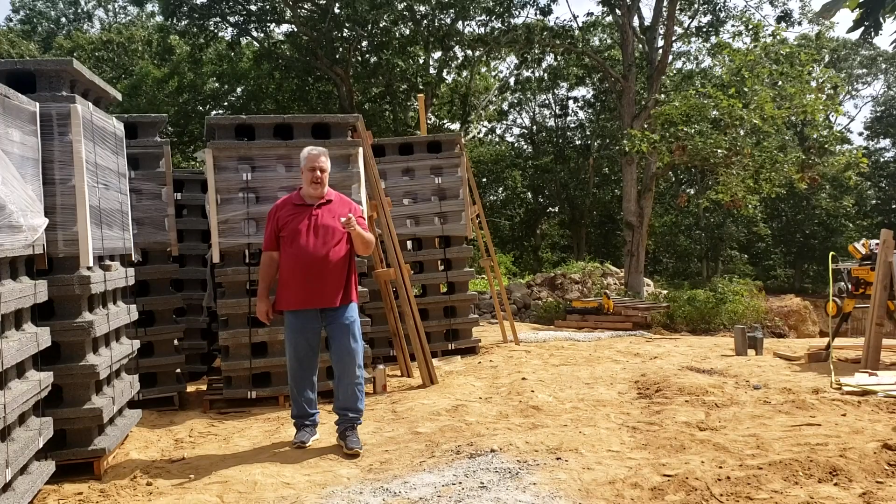Yes, we are starting a new project, so we're going to have probably a year's worth of videos coming live from this project. We're calling it the Vineyard Passive House. We're out here on Martha's Vineyard. The house that's going to be built here behind me is a certified passive house, and like any project, it starts with a really good foundation.

So we got some exciting stuff happening here, but before we get into talking about the foundation, let me introduce a good partner here. Farley is the builder of the project. He's also the owner of the home. So we have kind of the three-legged stool here between the two of us, and his wife, Daryl, of course. She makes a lot of decisions. We won't exclude her. But we have the design build team here.

We've been working on the house for a while, and as anything with passive house or anything that both Farley and I do, we like to scrutinize everything. So in this particular project, we talked about starting with the foundation. Well, we have your typical concrete footing, but that's where the typical foundation ends.

We're using this product. You can see behind me, we have these stacks of material here. So these are called the Perfect Block. They come from Arizona. Farley sourced them out for a number of reasons. I'm going to let Farley talk about that. But they get trucked up here and then ferried out to the island, and then they get put in place.

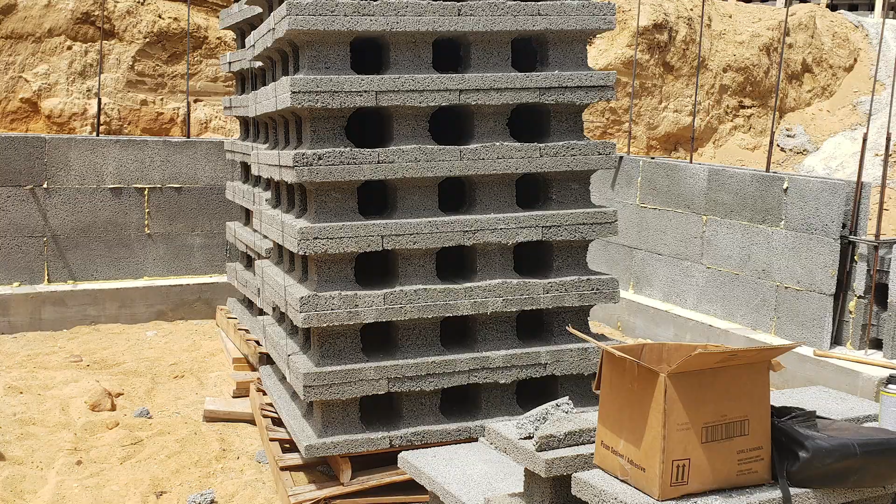Yeah, Steve. So these are what they refer to as an ICCF, insulated concrete composite form. So they're made with 87% recycled EPS, and then they get put into a slurry with concrete and a binding agent, and then put into a mold to create this block. The dimensions of the block are 12 inches tall, 48 inches wide, and 10 inches in depth. And they have these cores that you can see. They're 6-inch cores, spaced 12 inches on center.

And we source this block for a number of reasons. Being on an island, everything here gets trucked in. We have a concrete plant, but all of their raw material needs to be trucked in from off island. And by using these blocks, we're able to eliminate 70% of what we would normally need for concrete.

Yeah, so that's a huge number right there, right? You go from the 10-inch concrete wall down to using 30% of the concrete that you put into the traditional formwork. But I think you touched on something that's really interesting that a lot of us don't have to overcome in building.

When I'm back on the mainland, everything you do here, your commitment to build always has a strike against you in embodied energy, because everything has to get made somewhere else and be brought out here. Very few things - I mean, even your lumber, it's not cut on the island, it's not milled on the island and left here to be used. It's all brought out here. So your commitment to build from an environmental awareness is even more heightened than what we have to deal with in our struggles on the mainland.

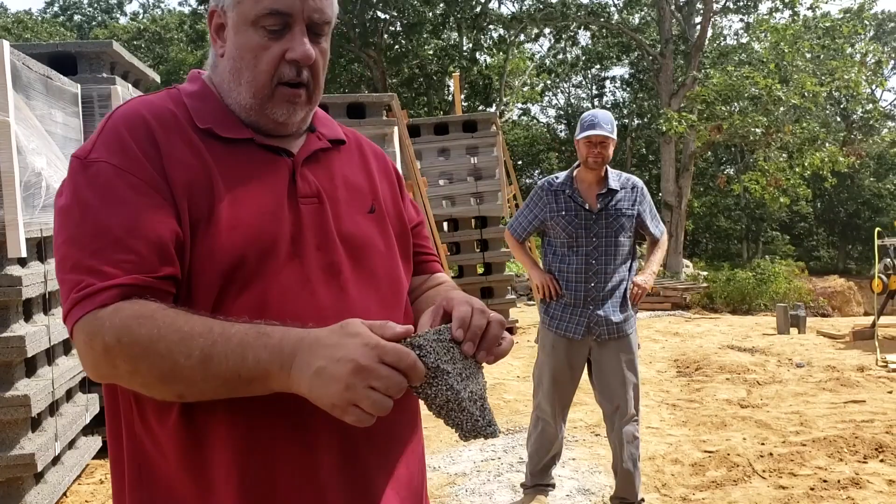And, to reiterate a couple of those points, everything you see behind me is almost 90% recycled material. So it already had a life. They took it, they ground it up. I actually grabbed a piece here that I can bring up and show you. You can see there, it's EPS. This is nothing more than the coffee cup you drank out of this morning. It just gets reconstituted. It's got this kind of concrete-ish type binder there that holds it all together. But it's basically a chunk of insulation that wraps around the concrete that gets reinforced.

And so the foundation gets its strength from the steel inside it and the core matrix that the blocks provide. So yeah, it's pretty cool stuff.

And this is fire retardant? Fire retardant, they actually refer to it as being fireproof. It's got a 4-hour fire rating, can resist up to 4,000 degrees. Another added benefit is that it's insect proof and rodent proof.

One of the concerns I've had about using a traditional ICF block is that it's used with a virgin EPS foam, so no recycled content. It's highly susceptible to insect damage. Even going to great lengths of protecting the wall once it's formed up, there's still a risk factor there. Termites are an issue here on the island. Insects, I would imagine, are an issue pretty much anywhere you go in the world. And so here we are coming up with a foundation that is using EPS foam, but 100% insect proof.

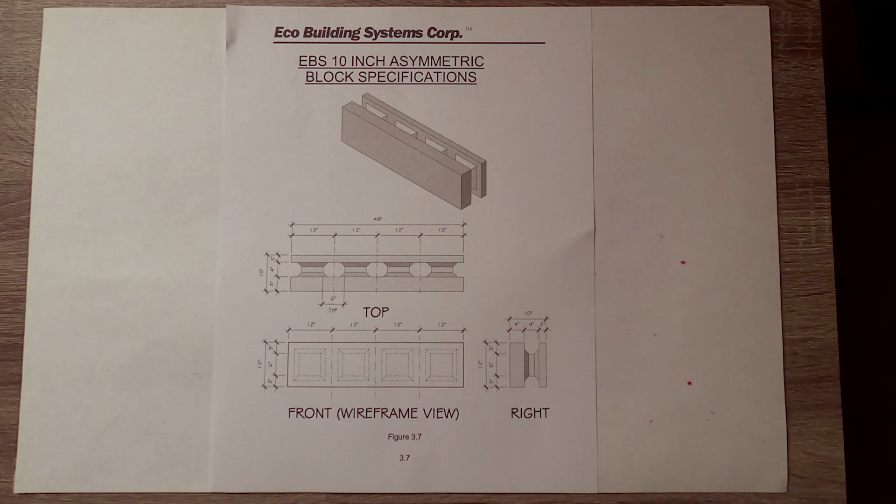So I printed out this one spec sheet here. It just gives you a quick overview of the block. You can see there, 48 inches, 10 inches wide, 12 inches.

This is actually the asymmetrical block. We have the symmetrical block out there. So we have two 2-inch layers.

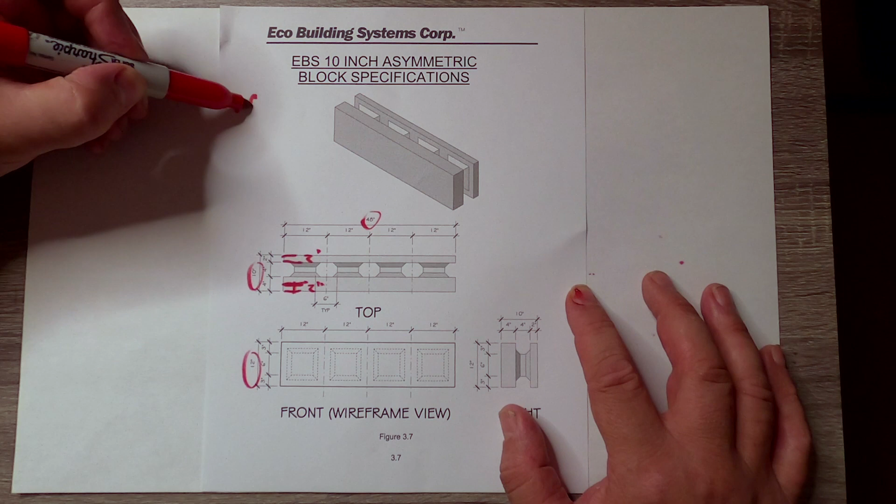But there's a lot of things that are pretty interesting about this block. One, it's not called an ICF, it's called an ICCF, and that stands for Insulated Concrete Composite Forms. The reason it's called a composite form is that 87% of this block is recycled material.

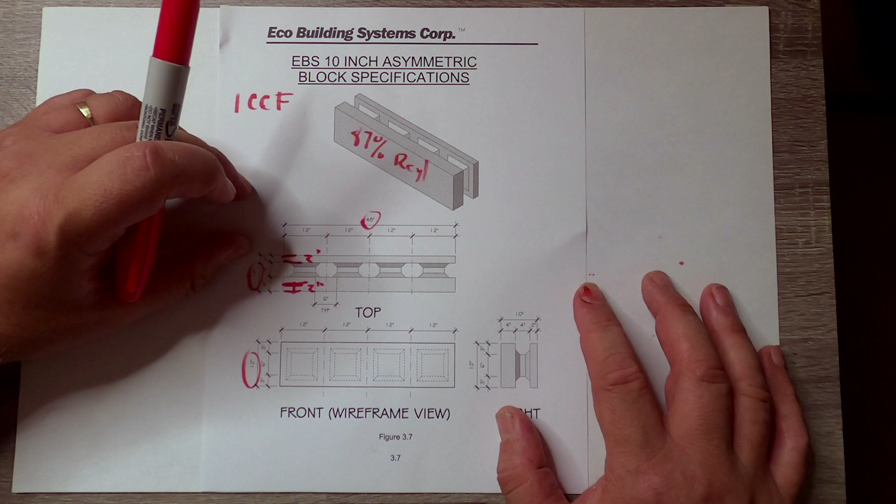This means the EPS was slated for the landfill or for trash. These companies bring their waste EPS to the Perfect Block or Eco Building Systems Corp, and then they reconstitute that recycled EPS with a binder, form these blocks, and ship them out to builders like Farley who want to build with them.

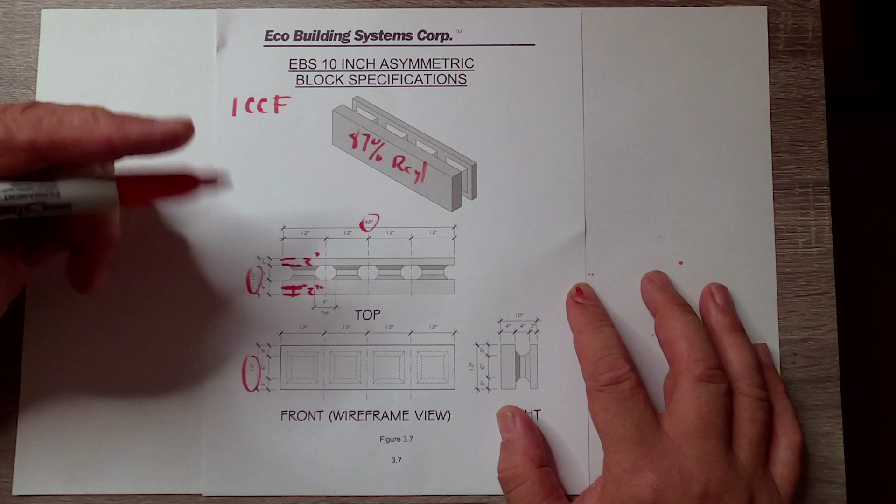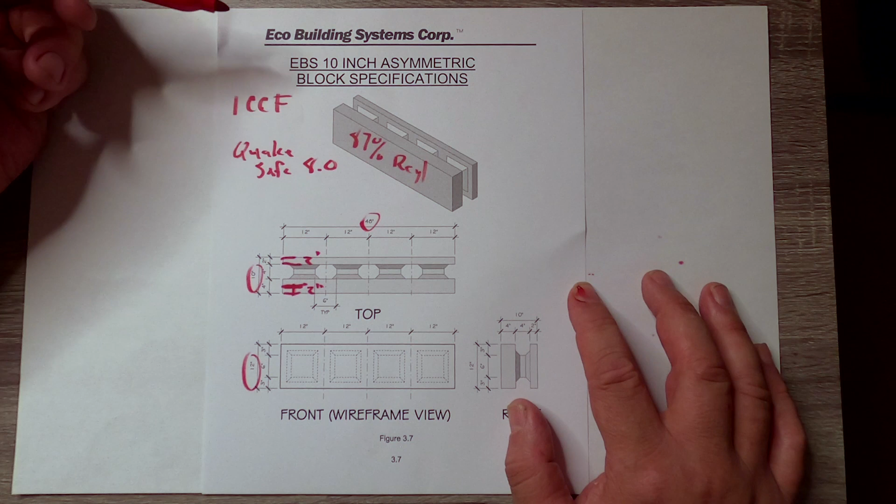There's a lot of cool things about the block. One, we just spoke of, 87% recycled, but it's what we call quake safe - never heard that term before - but rated to an 8.0. Given the right reinforcement schedule, you can build a pretty solid building here. It's also rated for 250 mile per hour wind, which is a pretty good hefty hurricane that it can tolerate, again, with the right reinforcing schedule.

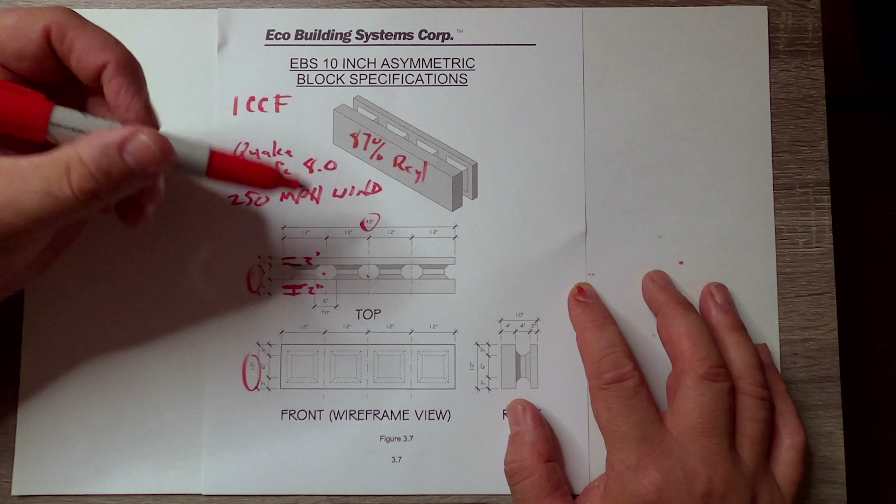The cool thing about this block is you have 3 cores, 12 inches on center. Ours called for number 4 bars every 24 inches, but you could make this a stiffer wall by adding reinforcing to each of those vertical cores. And the horizontal courses, we likewise had number 4 bars every 24 inches, and we could increase those to get those numbers working for us.

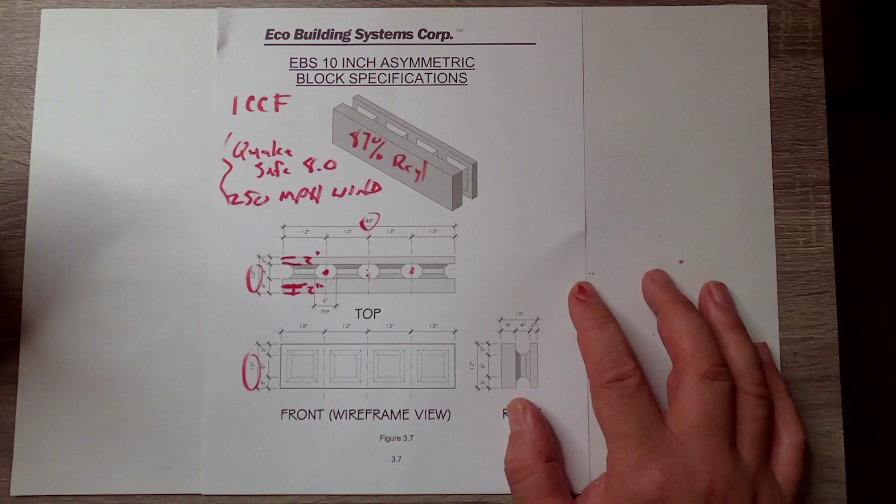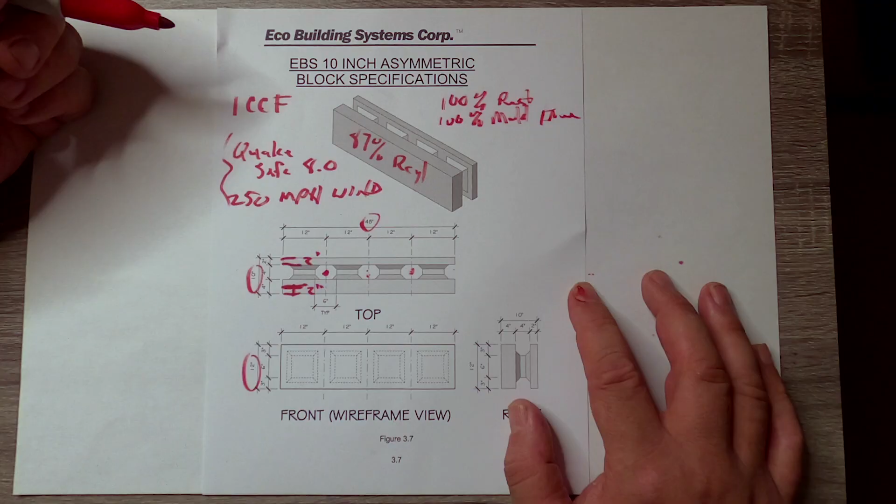But a couple other things. One, these are 100% pest-free, meaning animals don't like to chew them, they don't want to live in them, they don't care about them. It is 100% mold-free because there's no organic material there to sustain mold growth. They are 100% termite-free. So all of you living in those termite-infested areas, guess what? We got a solution for you, the Perfect Block.

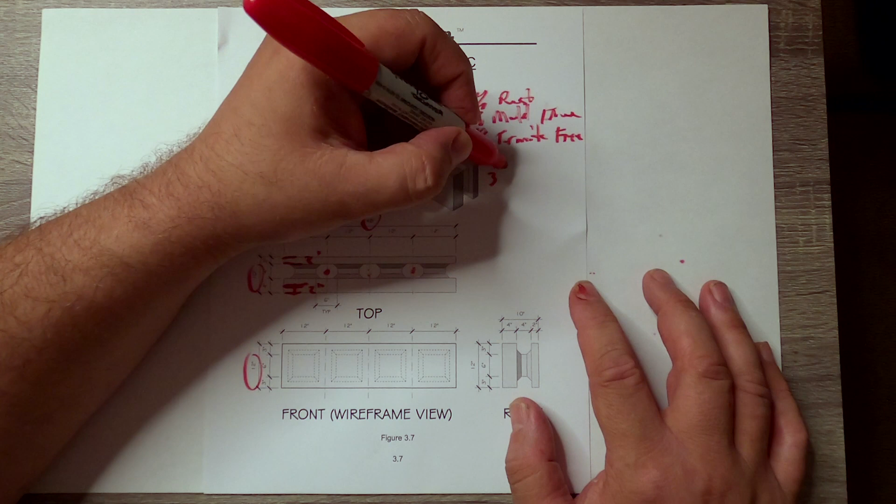A couple other things. We talked about the size. The weight of these blocks - you heard Farley say they're about 40 pounds - but depending on the size, they range from about 30 to 50 pounds. So they're big enough where one person can handle them on their own, but 2 can do it really successfully and lay them up pretty quick.

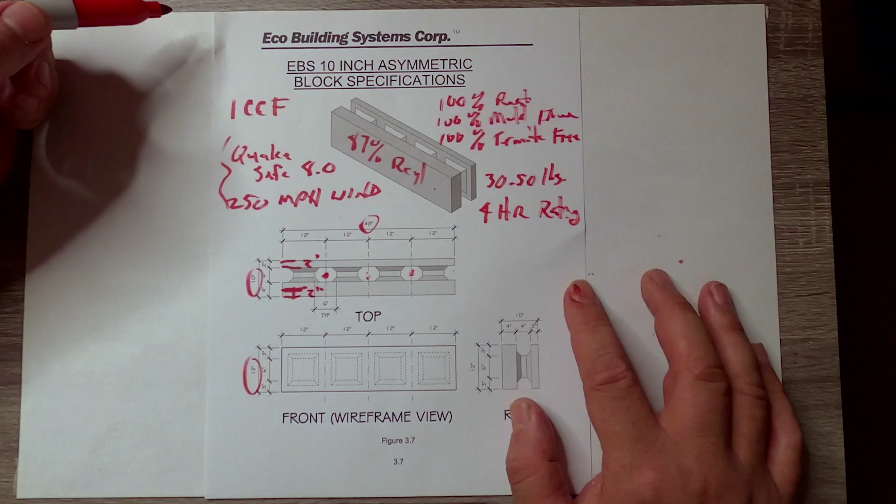The block itself has a 4-hour fire rating when you pour the concrete in there, so that's about as stiff a fire rating as you'll ever need. The blocks don't ignite, so you can't get them on fire. So if you're in areas where you have forest fires and brush fires, the Perfect Block might be a really good answer for that.

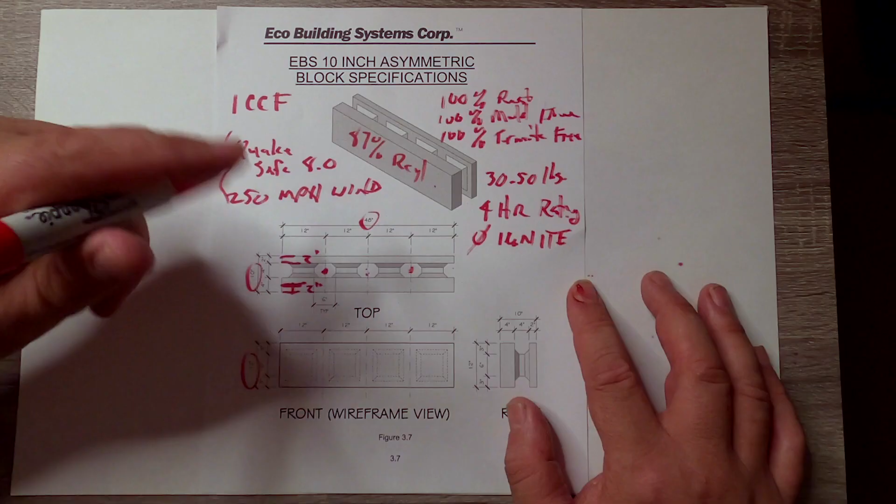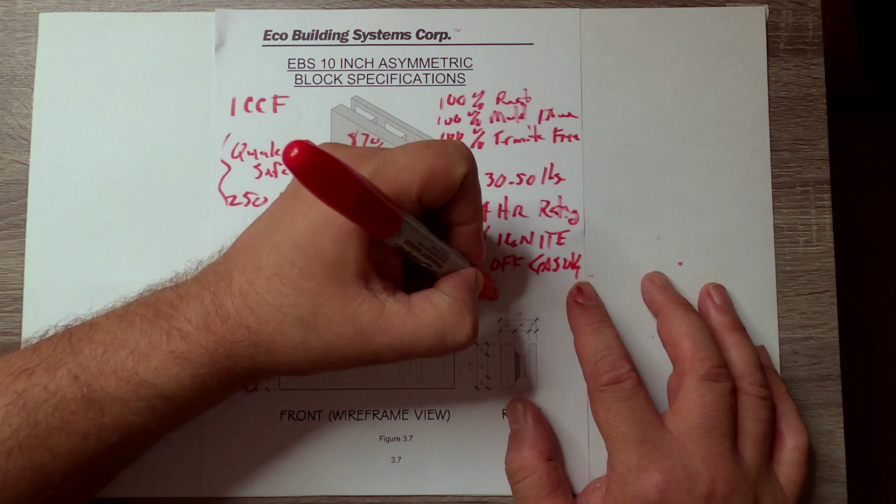There is 0 off-gassing. So these blocks, after they're made and sent out to the job site, they're pretty much inert, nothing there. And there is 0 UV degradation - UV doesn't kill them.

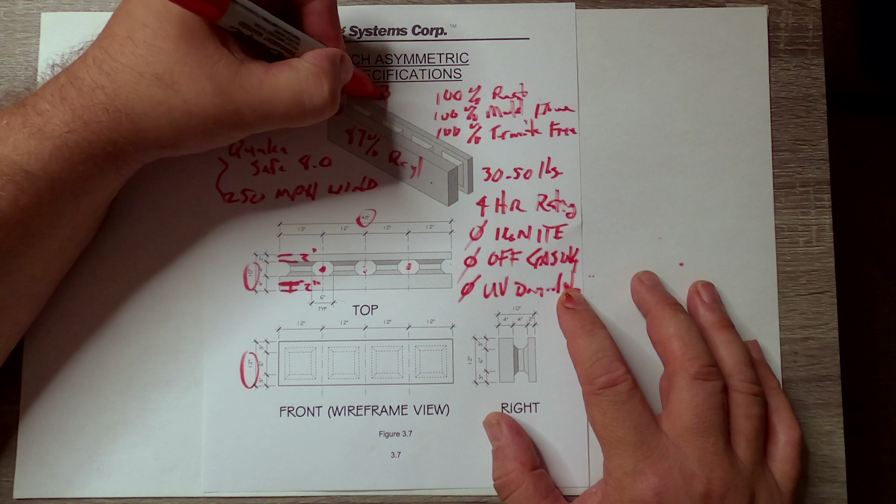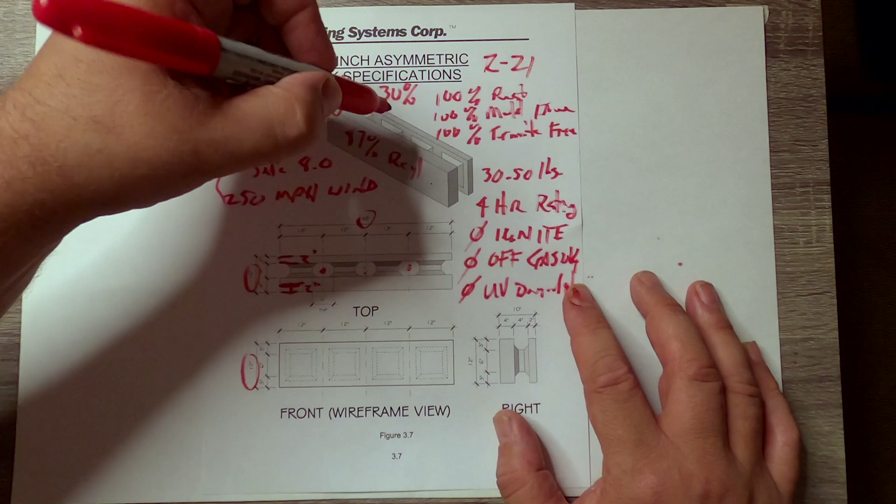Now, one of the coolest things about this is that the block, by volume, takes up about 70% of the volume, which yields a requirement of about 30% concrete. Imagine being able to build a foundation wall with roughly a third, less than a third, of the concrete required for a typical 10-inch foundation wall. And I get roughly about an R21 across the wall here. So not a bad deal. I mean, they labeled it the Perfect Block, not me, but they are pretty darn close to solving the world's problems with one block.

Let's take a look here. I also cut out a quick building section out of the set of drawings for us to take a quick look at.

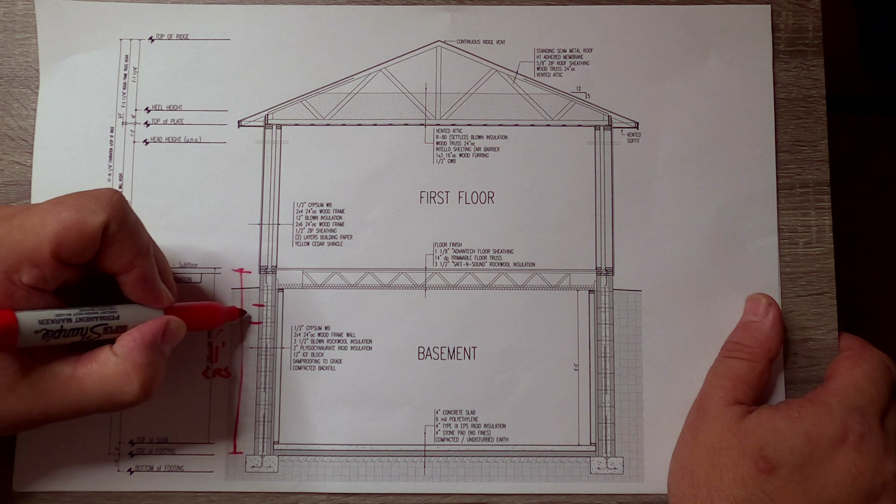You can see here we have our 11 courses that go down, and those are 1 foot increments. So we get basically 11 courses, 11 feet. When you subtract the 14 inches in the mud sill, the floor joist, and the 4 inches here, we yield about a 9 foot, 5 inch basement ceiling height.

So that's pretty darn good. Now, the beauty of that is we could have added another course or two, and that 9 foot 5 could have went to 10.5, 11.5, or we could have took a block or two out and dropped that 9.5 down to 8.5, 7.5, or you could do 3 or 4 courses and have a 3 foot, 4 foot crawl space.

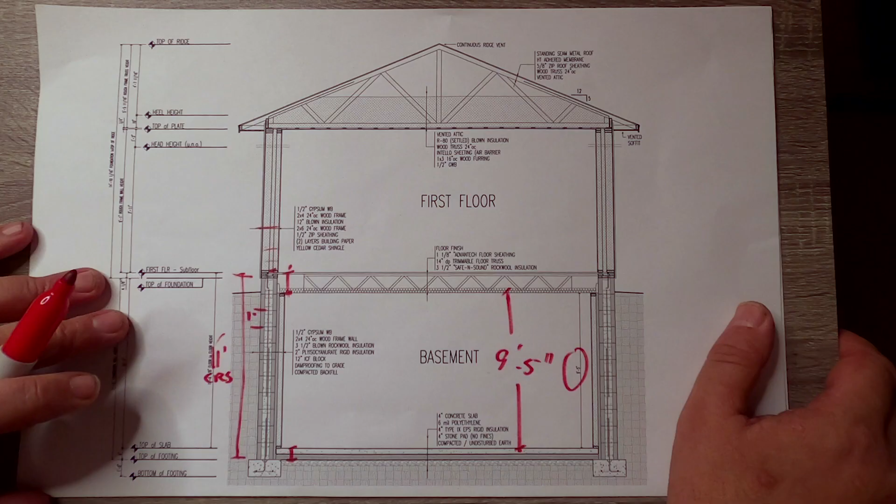Remember, termite free, already insulated. Get down in the southeast there, where you have a bunch of termites, you're looking for an insulated layup. Down there they use concrete block. When you saw this in the video, it very much looks like just an oversized concrete block, lays up the same way. You don't have to mix the mortar, which means you don't need water on the site. So if you're in one of those remote sites, you don't have the requirement of having water. It's just the blocks with that DuPont adhesive sealant.

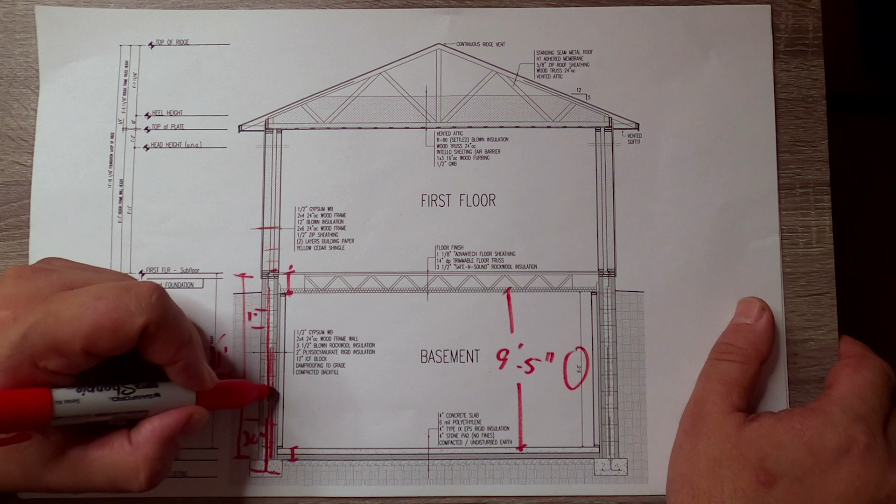And the reinforcing schedule is probably damn near the same as a reinforcing schedule for CMU block, right? So here we have that footer bar, and we alternate those. Every other one goes in the opposite direction. Then we have the starter bar, goes down to the footing, and then those get tied together. Remember, our spec on that was 30 inches. And then we have our finish bar, which comes down and connects to the starter bar, and that gets lapped at 30 inches. So we have the 3 bars in that 11 foot height.

These are all number 4 bars. For those of you that don't understand reinforcing, number 4 bars, reinforcing bars are measured in an eighth. So number 4 bars, 4/8 are a 1/2 inch bar.

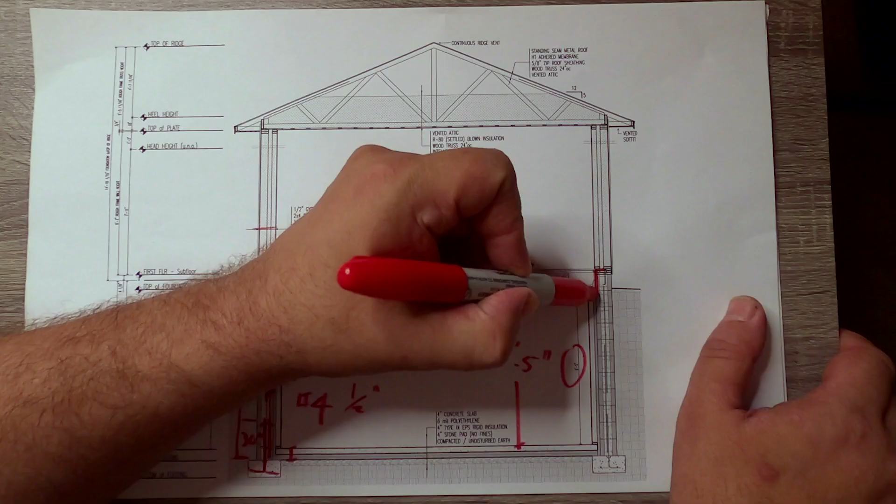And there you have it. One of the last things we'll talk about that I think is one of the coolest things about using this block, and was a big reason as to why we used it. We're putting joist hangers, and we're going to hang our floor joist inside that block. So what does that mean? It means the proximity of the floor to the finished grade is somewhere around 10 inches.

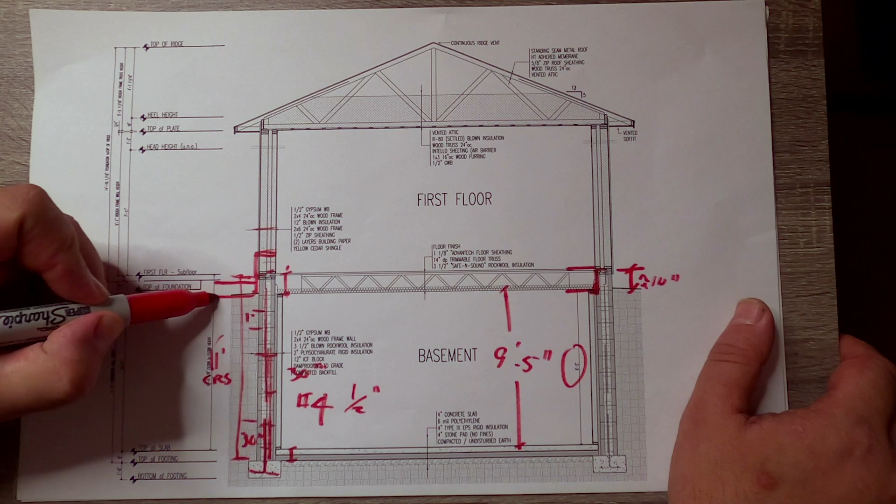So it's a lot tighter than that typical 21, 24 inches that you see by the time you finish the foundation wall. You put the 14-inch floor joist, the subfloor, the 10 inches here, the 14 there, and subfloor. Next thing you know, you're at 24, 25 inches, and you have 3 or 4 steps down. Having that 10 inches, we can just come out here and do a nice granite landscape or patio or something and tie it right in there.

So we're just that 1 step down, which was a huge part of the decision in using these blocks, in being able to sink that floor down inside that opening and get us closer to the grade down there. So that was a huge benefit.

Other than that, that's my intro to the perfect block. We're going to come back next time. We're going to talk about, and we'll talk about that detail in detail. We'll go back out to the job site, and we'll look at the block a little closer. We'll learn some of the little tricks and tips that Farley used in starting to use that block, and some of the lessons that he learned in using that block.